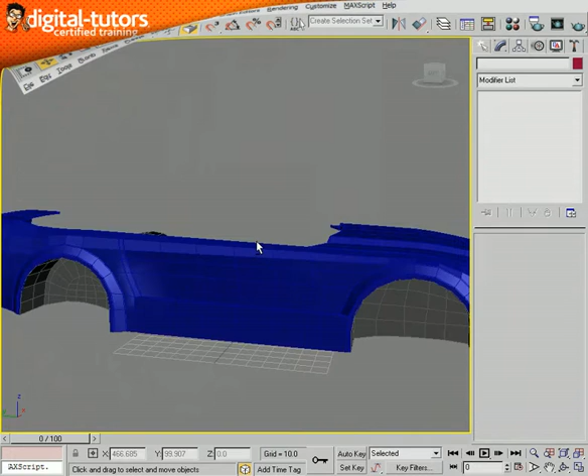obvious. So if we look in the side view here, we can see there's a line here where we've got kind of a panel where maybe is a different type of material attached. Maybe this is a metal, and then we've got kind of a plastic down here or something. But in any case, we want to achieve the same kind of look, and so there are several different ways that we can separate our pieces into separate panels.

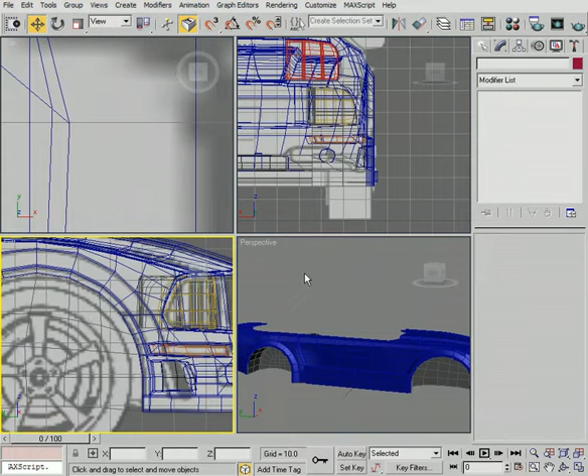And the first way is to actually detach that. So if I go and look at the back here, I can take a polygon selection and go across and actually select all of the polygons that I want to detach. So in this case, looking at this from the side, okay, this is going to be that bottom panel. Okay, so we can go ahead and take this and say, okay, that's good.

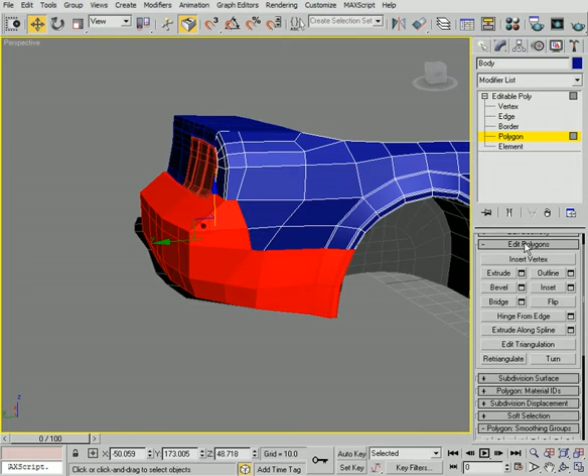Let's go ahead and just detach that. So we'll go to Edit Geometry and Detach, and there we go. Now keep in mind that we're going to have to add some resolution along this to actually make this look good when we smooth it. We want to have a little bit of thickness there.

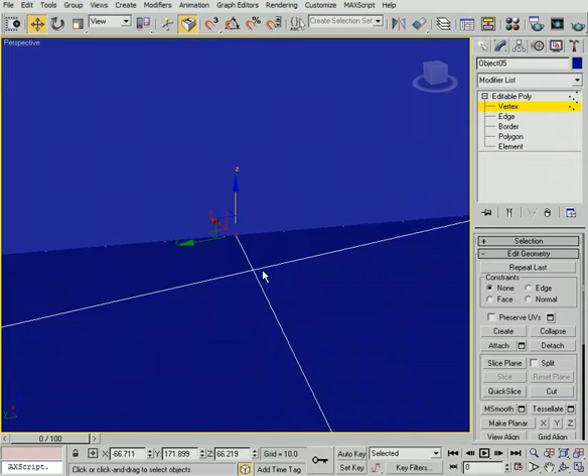Right, so if we go to cut, we can just bring edges right along here. Now in this case, we want to just bring that down and then start from this edge and come down. So then we go pick this vertex, not this one, but the other one. Go ahead and pick that vertex.

And you can actually pull that out. We don't need that other edge up there, so we can get rid of that. Okay? And you can just continue to draw that out, following along here. Now at this point you want to turn the corner, so we'll go ahead and turn that corner. Right?

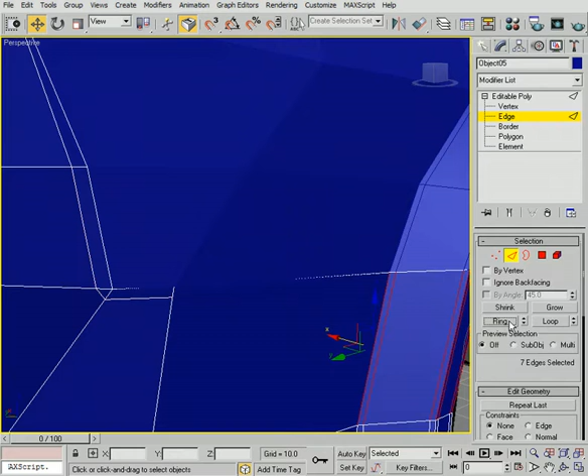And then we can select these edges since it's kind of a straight shot. Just select by ring, and we'll connect that and make it the same as the other one. So we'll slide that up, give it the same width there, and then we can connect that with our cut.

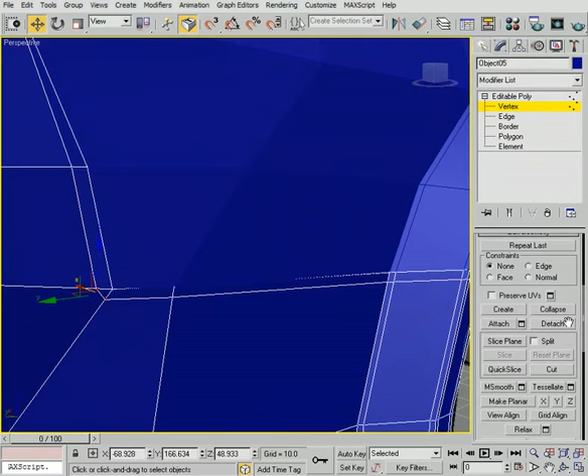And finally we'll take these two vertices and weld those together. There we go. And maybe pull that down a little bit. And you want to do the same thing up here on this top part, right? What you also want to do is add just a little bit of thickness, right?

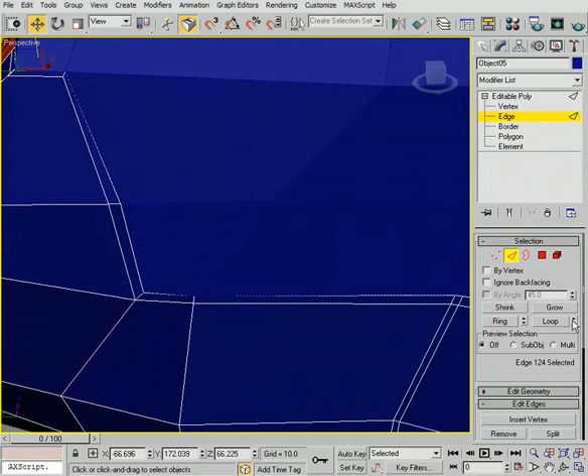So we can take this edge, for instance, and take maybe from here and just do it in sections. So we'll take this all the way down, and we'll turn on wireframe so we can see this a little bit better. Just hold down Shift and pull that in slightly, and maybe one more just to give it some thickness.

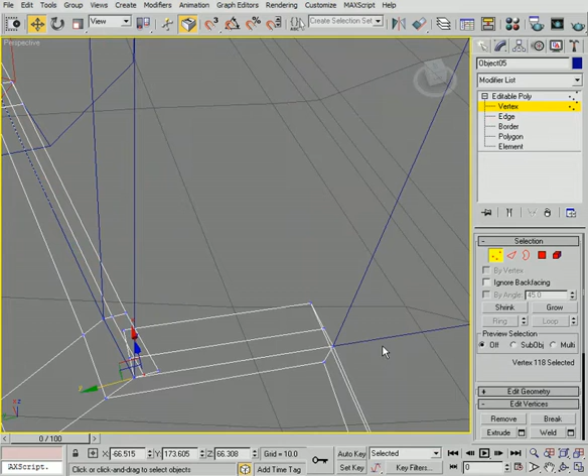And then you'll want to come in here and do the same thing and then match those up, right? So come in and select those edges, bring that in, and then you've got two vertices in here that you need to match up and weld together. So we'll go ahead and weld those.

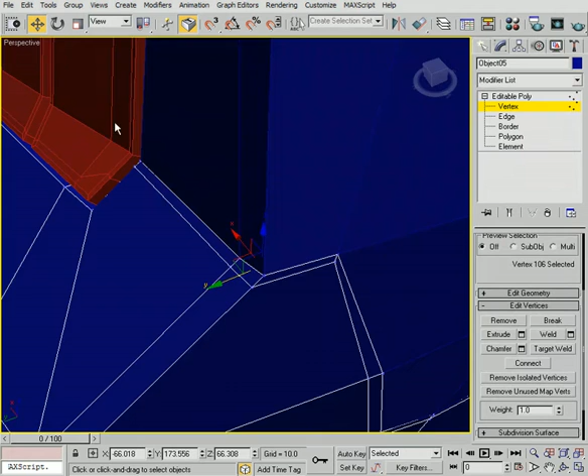Make sure you get them both selected there. And so we'll apply that and then select both of these, apply that, and say OK. And so now we're getting some thickness in here, right? So that when we go ahead and smooth this, it'll look a little bit better, okay? We'll have a curve, but we'll get kind of a nice tight line there.

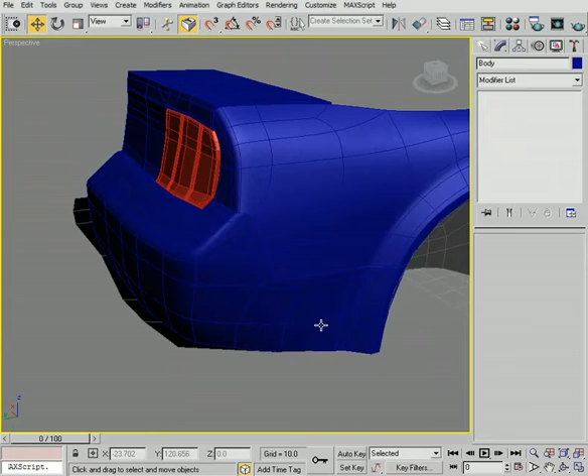And so the idea is that you want to add the thickness to this one as well. So then you'll actually end up with a kind of a nice tight line. Now there's another way to do this as well that doesn't involve disconnecting this. And this is going to work a little bit better for us on the front because we have kind of a straight line there. So we'll go ahead and turn smoothing off.

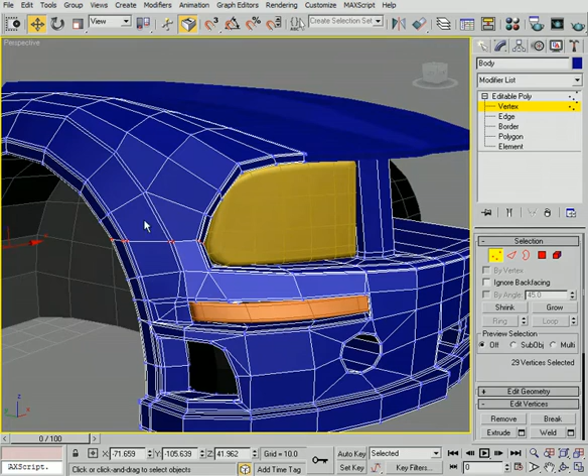And the place where we want to make a panel is right here. The first thing I'm going to do is select these vertices. Okay, just want these selected. And let me deselect anything else that we may have here. Just deselect all of those. So we just have these.

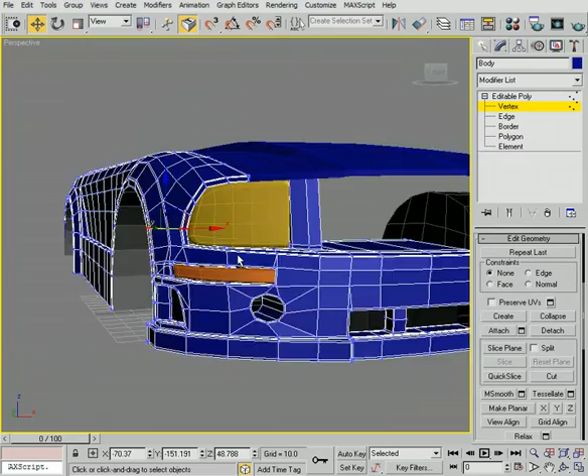And so now what I want to do is make these planar. Okay, so we'll go to Edit Geometry, make planar, and we'll just make them planar in the Y. That'll kind of flatten them out. Now we'll take this edge, and what I want to do is add enough resolution so that I can create this sharpness here. Okay, so what I'm going to do first is go to chamfer. We'll go ahead and chamfer that.

And I want to take that chamfer amount down quite a bit. Okay, and I think we want to go ahead and add two segments, I believe. And then we'll take that chamfer amount down quite a bit. So you want kind of a nice tight line there. And you see we've got 3 edges basically. We'll select that middle edge, go ahead and select it with a loop select.

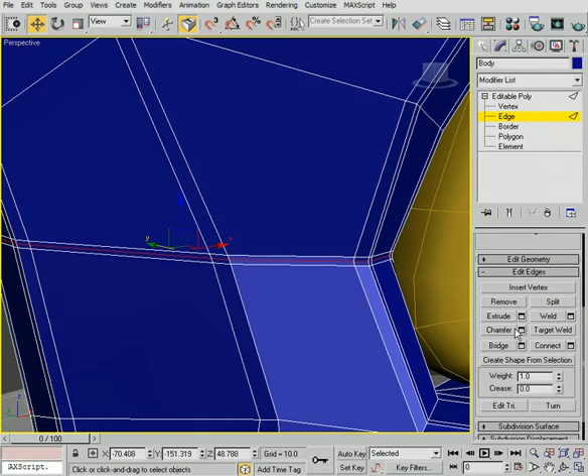And now instead of doing a chamfer, we'll go ahead and do an extrude on this edge. Okay, it's going to look kind of crazy, so we'll take that extrude to a negative amount, something pretty small. And let's go ahead and take this extrusion base width down. Okay. And as I take this down, you'll see now I'm getting those edges back.

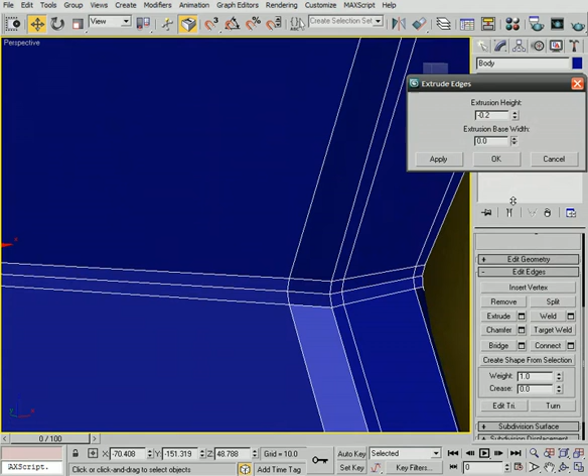So what I've got now is, and you could have those even touching and that would be okay. I'll just leave them a little bit so we can see what's going on. We have an edge to define the edge of the panel. We have an edge to hold it, and we have an edge in the middle. And what this is going to do, this is still one piece, but if we come in and smooth this, it's going to give the same effect as if we had cut that. Okay, but it's still one piece.

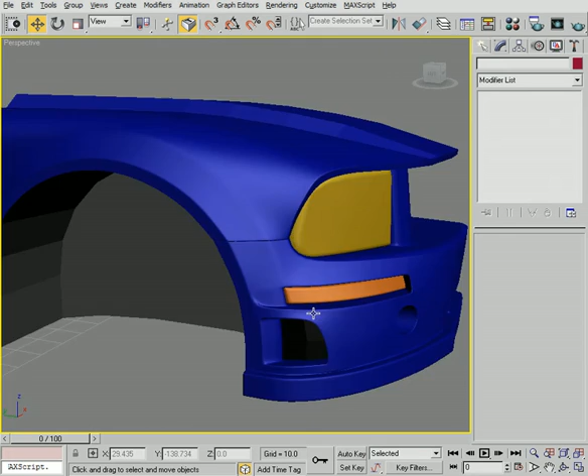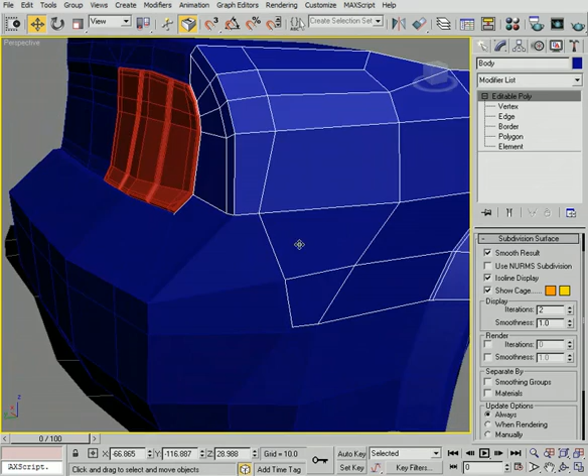You can see we have a nice clean cut right across there, so it looks like it's kind of fitted together. Whereas in the back, we may have to do a little bit more work as far as coming in and adding thickness. Okay? So on this, just make sure you do the exact same thing we did on this. You want to add an edge along here, add an edge along here. And then you want to go in and add some thickness to it.

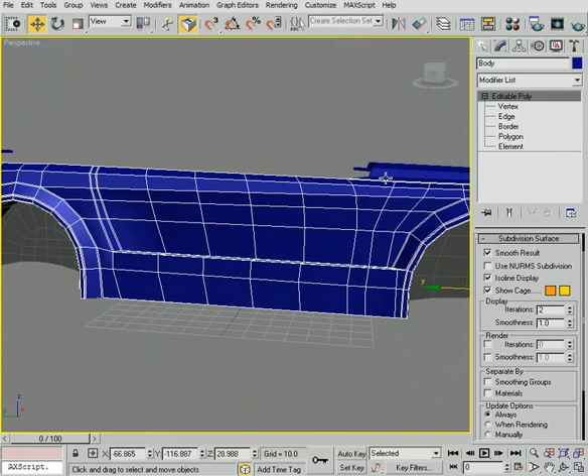Just a little bit. It doesn't have to be thick all the way through. Just a little bit so that you'll be able to see a little bit of a bevel there. All right. So once we get that done, the next lesson we're going to come down and I think start on the cab. Right. So we've got this whole area of the car we haven't touched yet.

So we'll look at how we can start to build this up and kind of the order of how we can do this. Obviously there are many different ways we could do this, just as there are many different ways we could build a car itself. So we'll look at just a few of those ways as we come in the next lesson and do that.